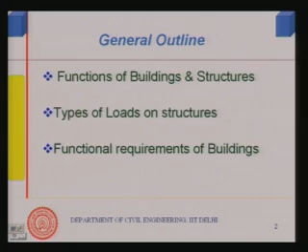Functions of buildings and structures as I mentioned, followed by types of loads on structures, then functional requirements of buildings, because load is one issue in buildings and structures, but there are other functional issues. So we shall discuss functional requirements of buildings, and from this follows the role of materials. So it starts with function of buildings - what are the functions of buildings?

What are the functions of buildings? Function of building is to provide a desired spatial environment within it continuously for a given human activity. This space may be controlled or uncontrolled.

Controlled example is an air conditioned building, where the temperature, the relative humidity etc. are controlled. Uncontrolled is any ordinary building where no temperature control, no humidity control etc. are actually done. So this is what is the function of a building.

Now, the building must provide this environment. After all, building is supposed to provide us a space in which human activity will go on, and must provide continuously an environment which is as we desire. Now, this must be safe. Safety is the first requirement.

It should be safe against all kinds of natural forces and also from man-made forces. So this space that we are talking of, that is the building, must be safe and comfortable. It must provide for safe and comfortable internal environment against existing external and unwanted internal conditions for any given human activity.

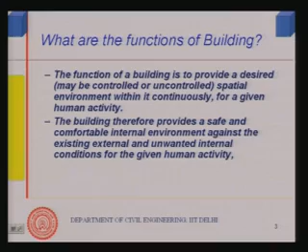When we mean human activity we mean, for example, in a classroom it is the teaching - that is the human activity. In a factory, possibly production of certain items. In a living space, living is the human activity, and so on. So this is what we mean by human activity, and this must be done quite economically.

We can't go on spending any amount we like to construct such a space. So we must do it with economy. This is the difference between a monumental structure and a modern functional building.

A monumental structure like Taj Mahal was constructed by a king, and he was not bothered about the monetary implication of such a construction. But modern functional construction must be done economically and also within a reasonable time. So both these issues of time and money are important in modern functional buildings.

Since we said it must be safe, and safety is most important in buildings or any structures for that matter, let us define the safety first.

Safe against forces of nature - for example, anything on earth has a tendency to go down, therefore against gravity load, a building or structure must stand erect, should not collapse on its own weight or something like that. Then it must be safe against wind, safe against rainfall or rain forces due to rain or snowfall, and also against earthquake or such kind of natural forces that exist.

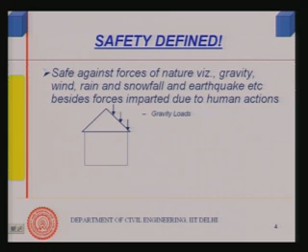There are two types of loads: vertical loads, such as gravity load, and horizontal loads, which might come from wind as well as earthquake. There could be other loads at certain inclinations, but generally the natural forces are of this kind. The natural forces that impart loads to the building or structure are what we call loads.

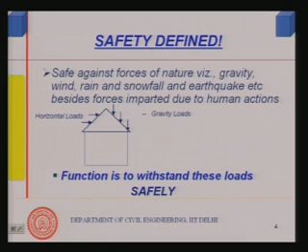The function of the building or structure is to withstand this load safely. It must withstand this load safely during its designed service period, for example 50 years, or for a bridge it may be 100 years. It must withstand these loads for its designed life, whatever you conceive as a life. That is how we define safety.

The issue of safety we have already talked about. Let us see the other issue. We said the building must provide for a comfortable environment. Now, comfortable environment internally against what? Against external environment. And what are the components of external environment? For example, humidity is one of them.

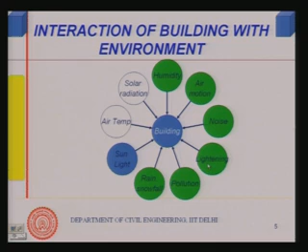Then you have air motion, noise, which of course is a human creation as we shall come to, and lightning, which is again a force of nature. Pollution is a human creation, rain or snowfall, which is totally known as precipitation, then sunlight and air temperature, solar radiation. So the external environment with which the building interacts are these.

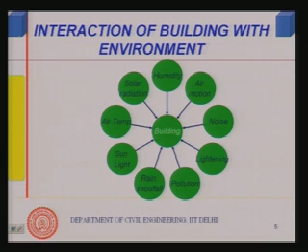Now, some of these are desirable. The building must act like a filter. It should allow some of those desirable aspects of the environment to come in, for example natural light, sunlight. In a school you would like to provide some amount of natural light. Similarly natural ventilation, air movement, so you would like to provide some amount of air ventilation.

But at the same time you would like to cut off some other things, such as excess temperature, which can generate heat within the building. In a summer condition, in a tropical location, the building envelope should provide a kind of filter such that heat radiation does not enter the room, but diffused sunlight, which does not create glare to the eyes, comes in so that you can comfortably see things. So the building acts like a filter, allowing certain good things to come in and not allowing certain undesirable things to come in. That is how it interacts with the surrounding environment.

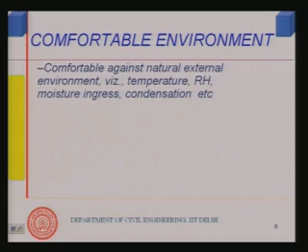So, comfortable environment - the space within the building must provide for a comfortable environment against natural external environment, like I mentioned, temperature, relative humidity, ingress of moisture due to rain, condensation, etc. Condensation is a phenomenon more common in western climate, not in Indian situation, except possibly Jammu and Kashmir or Ladakh, where temperature within the space is relatively high compared to outside. So a temperature gradient exists across the wall of the building or the section of an envelope.

The envelope is the wall, roof, etc., which is the cladding, the outer shell. So a temperature gradient may exist between the inside and outside air across the wall, and wherever temperature lowers down, the air containing moisture might suddenly condense within the wall. So condensation is a phenomenon not very common in Indian situation, but moisture ingress is more common. That may come from rain penetration, from ingress of moisture through seepage of groundwater by capillary action, or due to leakage of pipes, etc. So these are some of those external environments.

Some of the man-made environments, like I showed earlier, noise is one of them. Noise is a creation of industrialization. If you look at a very tranquil rural area, the noise pollution level will be very low, practically no noise will exist, just a little bit of birds singing. It is a very tranquil environment in a rural area. But if you look at an urban area, there is noise from traffic, noise due to industrialization, and so on.

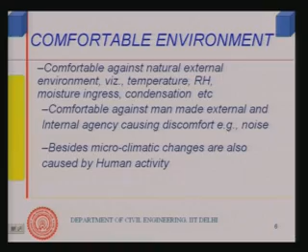Well, I must mention here something about microclimatic changes, because these are overall global or area-level climatic changes one can look into, but locally there may be some changes at a particular site. For example, an urban area is always at a much higher temperature than a rural area. That is because in an urban area there are a lot of buildings, and these buildings have their thermal capacity and therefore they store heat. So the temperature in urban area is slightly higher.

Besides, most of the urban areas are paved, and in paved areas the moisture does not stick to that place and no evaporative cooling takes place. So temperature in paved area is higher, because surface water runs off and the water will not remain there for future evaporation, and the evaporation process, as you know, results in cooling. So microclimatic changes are the changes caused by local topographic change brought in by construction or by human activity.

Tall buildings usually obstruct air movement, and therefore they would cause microclimatic changes. So microclimatic changes could be there, and therefore, while looking at the building, it must provide a comfortable environment against any kind of microclimatic changes caused by local human construction. So this is another issue one may look into when thinking of comfortable environment within the space.

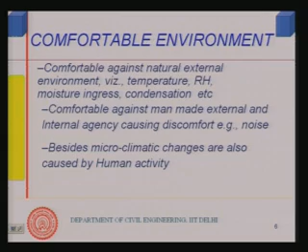Well, I have already mentioned the examples of man-made and natural external environmental conditions. These are, say, external temperature, relative humidity, solar radiation, air movement, and heavy storm, rain, gusts, snowfall, etc. Now, if it is high temperature, the deep body temperature should be maintained at 37.4 for a comfortable situation.

If the temperature is changed very much, let us say by a degree or so beyond 37.4 within the body, beyond a limit it could even be fatal, but you start feeling discomfort if the temperature goes high up, and the inside temperature actually depends upon the surrounding temperature. Therefore, comfort condition is a function of the temperature.

It is also a function of relative humidity, which you can feel in cities like Chennai, Calcutta, or even Delhi, where during July, August and so on, after the rainfall you have a lot of humidity outside. So although temperature might be lower, you still might be feeling discomfort because the relative humidity is very high, especially if you are away from the fan or similar places where some forced cooling takes place.

So humidity and temperature together with solar radiation, air movement, etc., are the external environmental conditions against which the building space, within a building, must provide comfort for a person.

The man-made conditions I already mentioned are noise, fire, accidental initiation of fire. Fire is a very important thing. This does not necessarily cause discomfort, but it can be related to safety and so on. And waste, odor, fumes, etc. These are examples of man-made and natural environmental conditions against which the space should be comfortable.

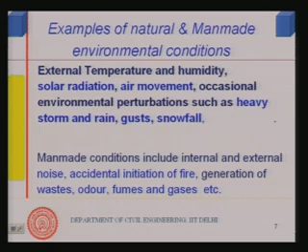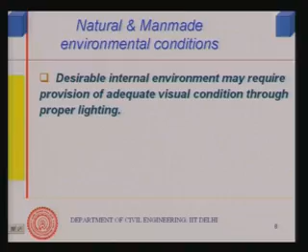Well, continuing with the same. So desirable internal environment may require even provisions of good lighting, because lighting was not talked about in the previous slide. So we have just now decided to talk about lighting. So lighting is another thing, visual comfort. Now, if you are trying to write, there is a particular amount of lux or illumination level you require. If somebody is repairing a watch, for such working in small details, one requires certain amount of visual comfort, and therefore the illumination level should be accordingly there.

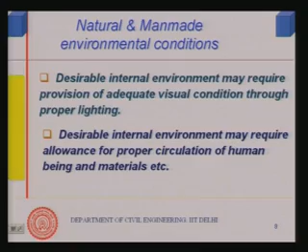Circulation is another issue, comfortable movement. The building space within a building should be such that there is adequate space for movement of people. If it is movement of material, then there should be adequate space for movement of material or movement of any other equipment and so on. So circulation is an important issue, visual comfort is another important issue while dealing with planning of a building. We should look into more details into these issues sometime later on in this lecture or in another lecture in the same module.

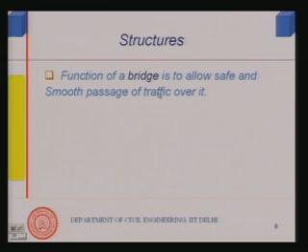Well, so far I talked mostly about the buildings, but what about other structures like bridges. The function of a bridge is to allow safe and smooth passage of traffic over it.

Similarly, if I look at another structure, let us say a dam, the function of a dam is to allow safe storage and distribution of water. Now these functions dictate what should be the size of the structures, what should be the overall dimension of the structure or building. We shall look into building planning in detail later, but for any structure the functional issues dictate the overall dimensions.

So we get the overall dimension from functional design. First we do functional design and from that we get overall dimensions. For example, if it is a bridge supposed to provide a crossing over a river 1 kilometer wide, then the bridge length would be dictated by the width of the river. Therefore the length of the bridge will be dictated accordingly, and the width of the bridge will be dictated by the number of lanes you want. These are the issues related to functional design. In case of a building also, the space should be decided by its functional requirements.

As opposed to this, the structural design of any building or structure—we can divide design into two parts. One is functional design, another is structural design. Structural design essentially looks into size detailing, because it is mainly for safety against loads and forces of nature. Therefore it looks into size detailing.

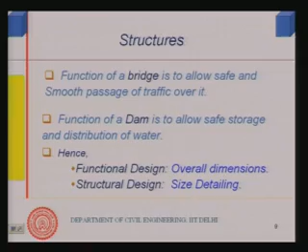So two types of design. When we talk of design of buildings and structures, we have two steps: one is functional design, the other is structural design. Functional design deals with overall dimensions, structural design deals with size detailing—overall dimension and size detailing. That is what design is about.

Well then we can look into structural design first—the safety, because we said safety is more important than the issue of comfort. We will look into the issue of comfort later on. So in this second part of the lecture, let us look into what are the types of loads, and safety against loads. Loads are basically the forces—loads are generated from the forces.

Three types of loads you can define. One is steady, that is, it is there all the time, it does not vary with time, and I can determine it relatively more precisely.

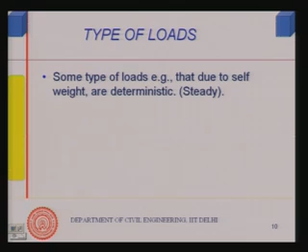Some loads are steady, some type of loads that is due to self weight. First of all, the structure must bear its own weight. Before it carries some other load, it must be safe itself, it must be able to carry its own load. That kind of load is very easily determinable, there is no problem about it, because if I know the dimensions of the structure, we will be able to find it out.

We shall see that again in somewhat more detail, and that load does not change with time. We call this load a steady load, because it is steady with time, it is time invariant. A second type of load is somewhat deterministic, but may change with time.

Say load is due to furniture, occupant or machinery, etc. In this classroom or in a class, people come and then they go. So it is not permanent, it varies over the day, or depending upon human activity cycle within the space, it might vary within the day and then go on changing over the day itself.

Supposing that I change this classroom after 10-15 years to something else, maybe a laboratory space, its loading pattern, the people coming, the number of people coming, would change. So its pattern of loading might change with time. It is not steady, it changes with time, and this load also we can determine, but with relatively more uncertainty than the earlier load which is permanent. There is of course difficulty, but these loads are not steady with time. So, therefore, it is quasi steady.

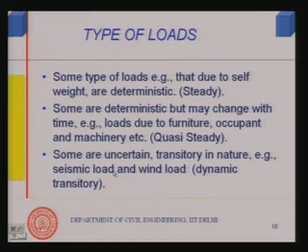We shall see them in the next slide or so, diagrammatically. For example, as mentioned here, seismic load, that is the load due to earthquake. With our current scientific knowledge, it is very difficult to predict the earthquake load, the amplitude or the amount of force that is going to impart to the structure. We cannot find it out with certainty. So this type of load we call uncertain, and it is transitory, acting for a very, very short period of time.

Earthquake acts for a very short period of time, it is not permanent in nature. It is just there for a few minutes or few seconds, and that is the end of it. Then wind load, heavy wind load, gusts, etc., they also act for a very short period of time. Therefore, these loads are dynamic, they are not steady, they change with time, and in the dynamic sense too, they are actually transitory, present for a very, very short period of time.

Diagrammatically, if we try to look at this load, it would be something like this. With time, if I try to see the variation of this load, a steady load remains constant. As I said, self weight is a steady load, so it will remain constant throughout its life. So, if this is the design life of the structure, it would remain steady all the time. It does not change. The weight of the structure does not change. So long the structure is there, the weight is there, the mass is there. So, therefore, this is a steady load.

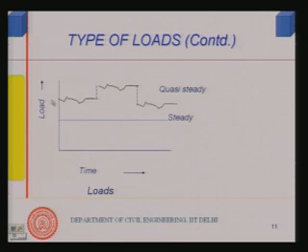Quasi steady load, as I said, there are small perturbations, as you can see, over this period, but by and large the pattern follows and it is more or less constant. But if the function of the structure changes, or if the furnitures etc. change, for example, a factory building may be converted into a bank building. There are similar examples plenty, or certain things are not economically viable. Functional life of a building may change, because life of buildings can be defined in 2-3 ways.

One is physical life, that is the building or a structure physically remains. But functional life is when it changes functions. For example, many theatres in recent years have converted into shopping centres. The structure is very much there physically, but its usage has changed. So, its functional usage has changed. It is being converted into a theatre, being converted into a cinema hall, being converted into a shopping centre. That is an example of change of functional life.

Up to certain years it was a cinema hall. So, that is its life as functional life as a cinema hall. After that it becomes a shopping center. So, its function, now it has got a new function. Now, the furniture should change, the number of people coming in etc. will change, and therefore, the load that is semi-temporary, semi-permanent, that would also change.

But once it starts, it is there for some number of years. So, that is what is being shown. This is constant for some number of years, and after that it may change or may not change in many cases, but in some cases it may change and become higher. It can be lower also, and for example, in this period it is being lower. So, these loads are not steady, not fully steady, but they are quasi steady. They remain there for certain periods of time, and within that period of time also there are small perturbations. For example, people will come and will go - human load. So, that is what it is. These loads are quasi steady load.

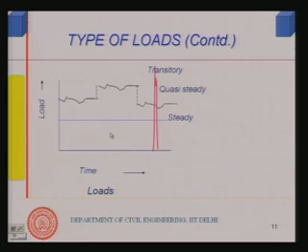And then the third variety which I mentioned was transitory. It is over a very short period of time, as you can say, and it comes and is there and then just vanishes, and it is dynamic in nature. So, it suddenly comes, it may come once or twice, or maybe depends upon chance. Most of these loads, wind load and earthquake load, depend upon chance. It may come once in 50 years for a particular load, or it may come once in 100 years, or may come even twice in 50 years, and so on. So, depending upon those, it is very uncertain, because many times so many factors control them, so many factors cause them, and a good lot of it is even unknown today, particularly related to the earthquake. So, that is not even known to us today, and therefore, they are quite uncertain, but since we have to design the building, we have to find out the load in some manner or other, we estimate them.

So, what do we do? We estimate the load. Now, these loads, as you can see, the steady load is constant over time. This is varying with time within this period also, but the pattern remains the same for a long period of time and again changes, and this is sudden. Now, there is no fixity, there is no fixed value with time. If I have to take all loads into account in some manner, in fact there is a summation I should be taking for design of structures, some sort of summation, some way. Although the peak of all the loads do not act together, as we understand, but I've got to take account of all this load in some manner.

So, how do I do it? Well, in some way, based on certain mathematical methods as well as experience, we take this load into account and find out what is known as design load, against which the structure must be safe. Design load is that load used in design calculations, and it is safe against such a design load. So long as the actual load is lower than this, it is safe.

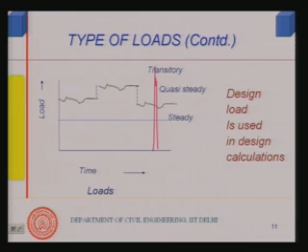Now, as I said, precise computation of the actual load that the structure is likely to encounter in service is difficult. You can't find it out precisely. I can possibly find steady loads fairly precisely, but even for quasi-steady load it is not so easy, because it can keep on changing. So there has to be some way to do that, and when it comes to transitory load, it is still more difficult. Precise computation of such load at any point in time is practically not possible.

So I should have some way to do that. So what do we do? Well, we rely on experience and also scientific knowledge.

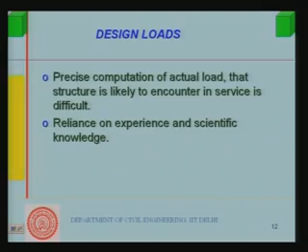It must be understood that civil engineering is not totally mathematics based. There is always a certain amount of experience involved, because we deal largely with natural systems. You deal largely with natural materials like soil, or slightly processed materials like concrete, and sometimes well-processed material like steel, or even polymeric materials and composites. But quite often we deal with natural materials such as soil, or less processed material like concrete, which is man-made but less processed than steel. So when you deal with such material, and want it to perform against natural forces which are not known to us, not within our control...

So we can't rely totally on scientific knowledge. Experience is an integral part of civil engineering design, or understanding even. Experience of people accumulated over years is used in civil engineering design. For example, whether it is the Egyptian pyramids or Qutub Minar, Taj Mahal or similar temples of South India, these were built even before modern scientific knowledge was available. By empirical observation and simple experience, people built those structures.

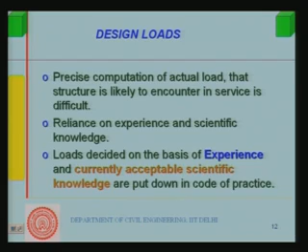So how do we find out design load? We can look into codes which are available. In India, we look into the Indian Standard Code, maintained by the Bureau of Indian Standards, a Government of India body, and it defines different types of loads.

The classification of loads as per Indian standards, I will mention one by one. Dead load is the first one, and the corresponding code is IS 875 Part 1. IS stands for Indian Standard, and they have numbers like 875. Part 1 deals with dead load.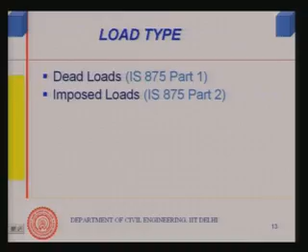Then there is another load called imposed load. I mentioned earlier there are 3 types of loads, but for practical usage, while finding out how much load I should use in design, defining loads as steady, quasi-steady and transitory is not sufficient. Each type of load must be determined separately, and therefore the classification is: dead load, imposed load, wind load, snow loads, earthquake load, special load and load combinations, with corresponding codes shown by the side.

For example, IS 875 Part 1 deals with dead load. Imposed load is IS 875 Part 2. IS 875 Part 3 deals with wind loads, and IS 875 Part 4 deals with snow loads.

Earthquake load is dealt with specially because of its uncertainty and the importance given to it, since calamities or failures due to earthquake, or even fatalities, are much more. Seismic load means the same as earthquake load. Then there are special loads - loads like fire, temperature, etc. are encountered in special loads.

So the question is, how do we define what is dead load and so on? We will come to it. Dead load is the load that is permanent to the structure, as given in IS 875 Part 1.

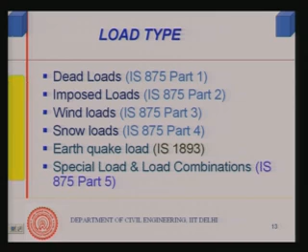But besides that, there is something called load combination, which is also an important issue. How do you combine all this load to calculate the design load? Because all loads are not going to act together, and especially they will not act together at their peak value. So all loads do not act together, especially to their peak value. Therefore, how do I combine these loads? This is dealt with in this particular code, IS 875 part 5. So IS 875 part 5 deals with this, and this is how we combine this load - that is what is talked about in this particular code, and we shall see how it is done a little bit later.

Well, calculation of dead load is pretty simple, as I said, because it is deterministic. I can determine it, and it is constant with time, so there is not much variability. Once I calculate its value, that is my design load. How do I calculate it? Since it is a permanent feature of the structure, the size of the structure itself, its self weight, contributes to the dead load. So I got to know its dimensions.

If I know its dimensions - length, breadth, width - then I can find out its volume, and volume multiplied by the density of that particular material that has gone into making it gives the load. For example, if it is steel, then simply 7,850 kg per meter cube is the density known to us, multiplied by the dimensions of the structure, that will give me the dead load that it is supposed to carry.

I might express this load in terms of kg per meter length of the material. In that case it will be the area multiplied by 1 meter length, which gives the volume multiplied by the density. I am not going into detailed calculations, but I am trying to give you an idea of what is dead load.

So dead load - why we separate it out from the rest - is because it is very easily calculable. If I have a structure made of concrete, I know its density is 2500 kg per meter cube. If the dimension is known, that dimension will give me the volume multiplied by the density, which gives me the weight it has to withstand from its self load, over the thickness of any finishing item used, for example, the flooring in a floor. So if I know the thickness of the flooring and the density of the flooring material, I can find out easily.

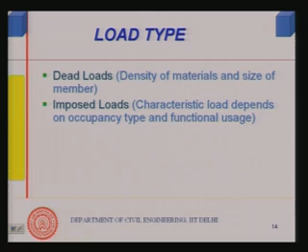This comes from statistics - you can take a 5% chance, otherwise the load you would take would be very, very large. So characteristic load, as we call it, is that load which will be exceeded only 5% of the time, 95% of the time the load is not exceeded. And how much of this load should I take? That is codified. And how did it come into the code?

Experts sitting together by consensus arrived at this load. In many countries these loads are there, and for various codes, there are worldwide different codes, international codes too, and they incorporate the experience of experts all over the world. These are taken into account while deciding upon the load to be used in a given country. In our IS code also it has been formulated similarly, and these values have been decided, taking 5% of the risk.

That is not the end of it though. I do not design only for that load, but multiply it by a factor called the factor of safety, which I shall discuss later on. So, imposed loads are decided like that.

Then it comes to wind load. When it comes to wind load, most commonly we design it taking it as an equivalent static load, a static horizontal force. I mentioned horizontal loads earlier. So I consider an equivalent horizontal force which is static, acting all the time, because it is mathematically more difficult to handle a dynamic load that changes continuously. But today that is all possible, and dynamic analysis of structures is also done. I will just mention this later, but that is not the purpose of this lecture. I just want to show you the types of loads and how one arrives at the design load, a little introduction, because this course is more on construction and materials, and we are trying to look at the role of materials. There are courses on design of structures where detailed estimation of loads is taught, at a higher level.

So it depends on the velocity, the equivalent static load depends on the basic wind speed. Now, basic wind speed at a given location has to be found out, and that comes from meteorological data - data on wind speed at a particular height, usually 10 meters. This has been collected at meteorological stations all over the country, with many years of data, even 50 years, taken into account. The probability of a certain wind coming in a given year, say 0.02, basic statistics are taken into account, and the basic wind speed with a 50-year return period is determined. This 50-year return period means the probability of finding that wind speed once in 50 years is taken into account, and that wind speed is recorded in the code.

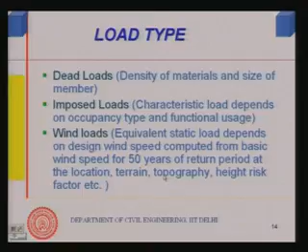The code gives you basic wind speed values. If you study a course on design against wind load, details would be told to you at that point. But for now, understand that wind load is calculated based on basic statistical data available for many years, and the wind speed expected to be exceeded once in 50 years is taken as the basic wind speed. This basic wind speed is used together with terrain topography - if it is undulated ground, the forces would be of one kind. The height of the structure is another issue - if the height is more, velocity would be different, and the equivalent static pressure or load is calculated based on basic wind speed, location, terrain, topography, height, and the risk factor of the structure, etc. More details are unnecessary for this course. So this is how wind load is calculated.

Going back a little bit, this is how you calculate the wind load, given in code 875 part 3. The formulas, equations, etc. are given there. Snow loads are given in part 4 of the code mentioned earlier.

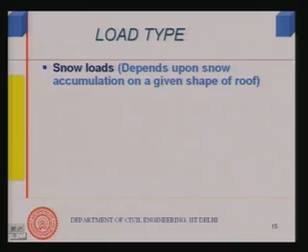Snow load depends upon how much snow is likely to accumulate over the given surface, and the slope of the surface. A flat surface will have more snow load compared to an inclined surface. So based on inclination, shape of the roof, and amount of snow accumulation at a particular location, one can calculate snow load, as given in that code.

Where data for a particular location is not available, one can approach the appropriate government organization which keeps this data. The code gives values wherever available, and where not available, it suggests approaching the appropriate body. So snow load is calculated on this basis.

Earthquake load is more complex to calculate, in fact much more complicated. Conventional design was based on calculating an equivalent horizontal load. Earthquake is nothing but ground motion, both horizontal and vertical component, and it is random motion. One can calculate an equivalent horizontal load for design purposes, as was done earlier in codes, and even now this is allowed.

But how much is the equivalent horizontal load? That depends upon importance of the structure, type of foundation, and which zone - whether it is an earthquake prone zone or not. For example, this country has been divided into 5 earthquake zones, zone 1 to zone 5, with zone 5 being most seismic prone. Based on flexibility of the structure etc., you can calculate earthquake load.

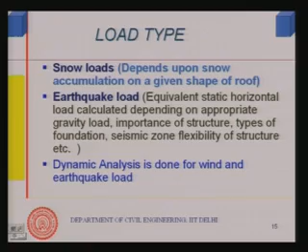Dynamic analysis is done for wind and earthquake load, so you can find out how much is the wind and earthquake load. That means you can take into account the time-variant nature of the earthquake ground motion, and calculate exact details. Today, with the advent of computers and modern mathematical tools, those are available.

Experts on earthquake engineering do this job, and if you take a course on design against earthquake load, you would come across this. But this particular code 1893 tells you how to take an equivalent static load, and the process involved and factors involved in earthquake load calculation.

Lastly, in special load types, I mentioned temperature, because diurnal variations can be very large, seasonal variations could be very large, and that can cause expansion and contraction of the material. If the material is not allowed to expand and contract, it can result in temperature load. How do we take that into account? That is given in part 5 of code 875.

Then material like concrete shrinks - there is shrinkage. So those shrinkage loads, moisture, fire etc., hydrostatic pressure due to water, soil pressure - those are given.

Fatigue is one thing I would mention. Fatigue comes from repetitive loading. You might have seen, if you take a small wire and bend it like this, after some time it breaks - although you have not applied very high load, it has broken in fatigue. That is called fatigue loading.

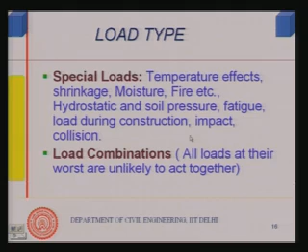How you take account of fatigue load, load during construction, or impact or collision because of certain situations - those are taken into account in this particular code. These are special loads, taken into account in the code 875 part 5.

Load combination - as I said, all loads do not act together, and therefore how do I combine these loads to find out the design load? That is also given in this particular code.

I think with this we will conclude this lecture. In the next lecture, we will cover additional aspects of load and load type whatever is left, and then follow up with other aspects of functional requirements of building and role of materials, which is part of this module in the next lectures. Thank you.